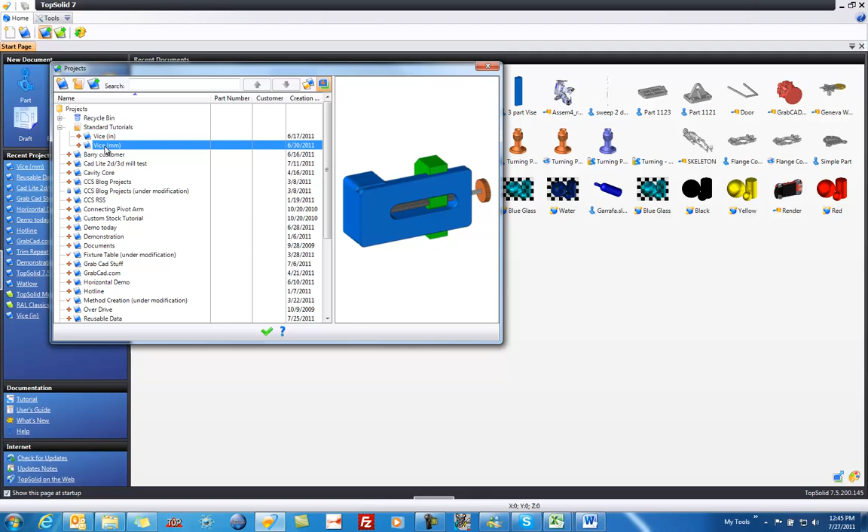To get started, we're going to open up an existing project. So we'll go to our project manager, scroll up until we get to the standard tutorials, and launch the tutorial in either inches or millimeters. In this case, we'll do it in millimeters, so I'll double click there.

The very first thing we want to do is design the base of our vise. To do this, I'll go to my project manager, currently docked on the right side of my screen, right mouse button click on the folder I want to put the part in, and select Part. TopSolid'7 has created a new part for us and is asking us to name the file. Let's name that base. Once I've finished typing the name, I'll hit enter or click elsewhere on the screen.

From here, we're going to create our first sketch. Make sure you're on the Sketch tab, in planar mode, and then select the contour icon. You'll notice TopSolid'7 automatically orients us to the XY plane.

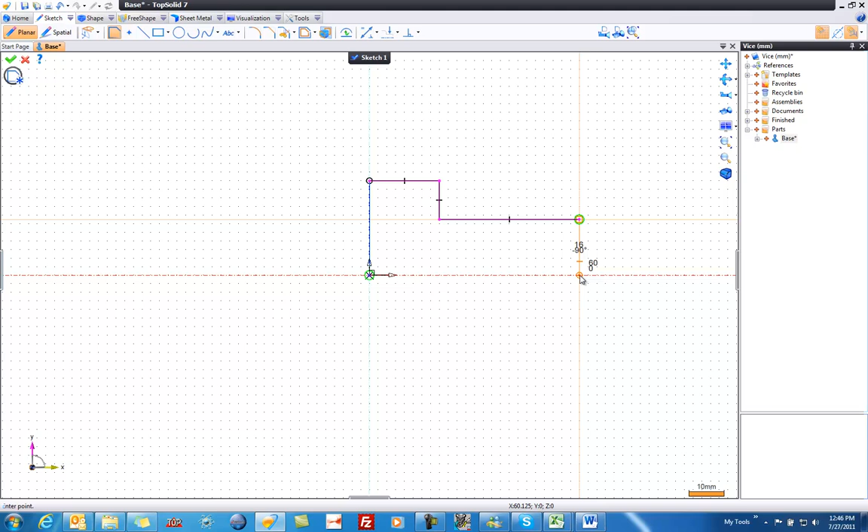We're going to click right on our 0,0 point and come up some distance, then over some distance - I'm not too worried about the sizes just yet. We'll come down, and notice when I hover, I get that little round point adding a relationship. Then I can click back to 0, or hover anywhere on the model or sketch. I'll click right to 0, and like that we've laid out our first sketch.

From here, we're going to add some dimensional constraints. I'll go up to my constraint icon. For power users, you can also get to constraint by right-clicking on the screen and choosing constraint - both will get you to the same place. Now we're going to add some dimensions.

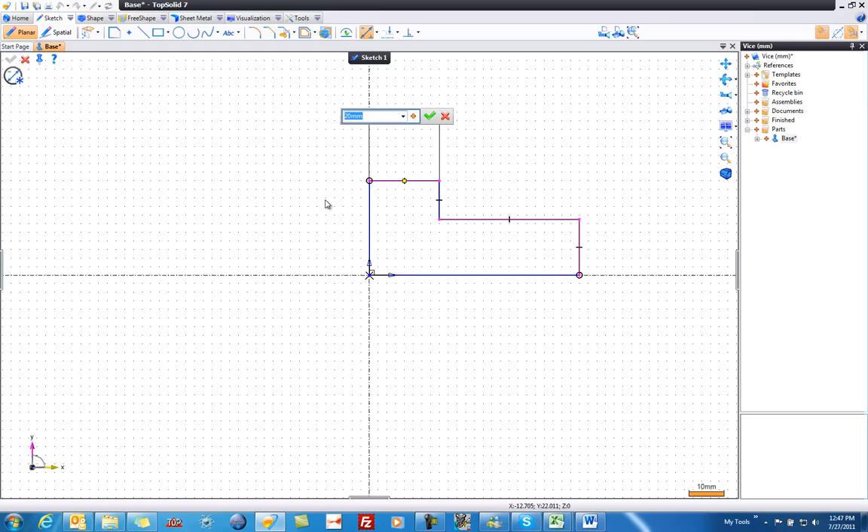I'll start right here, and right now it's coming up and measuring as 30 millimeters. According to the print in the tutorial, we want that to be 40. Watch what happens when I hit enter - you notice how TopSolid'7 was smart enough to auto-scale the entire sketch so that the roughed-in sketch is maintained.

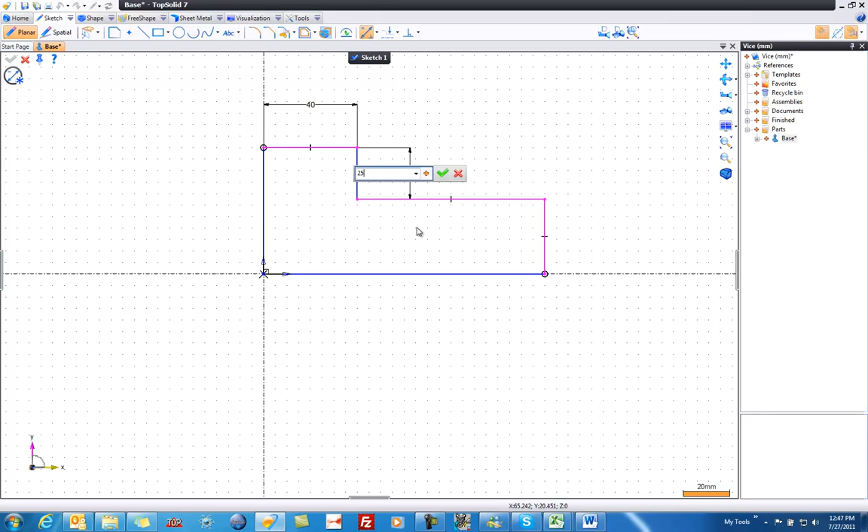Let's add a few more dimensions real fast. I'm going to add one here - that's going to be 25. We'll add another one right here, and that's going to be 24. Now at this point, you'll notice the sketch is blue on all sides except right here, which is purple. What does that mean?

Well, that means that portion of the sketch is under constrained. How do I know? If I left click and hold my mouse on it and grab, I can drag that sketch, but only left and right. That's because these dimensions and geometric constraints, automatically added when we created the sketch, have everything else tied to our 0,0.

So let's go ahead and add our last constraint. I'm just going to select this bottom edge, click to locate, and set the value to 155 millimeters. And like that, our sketch is now fully constrained.

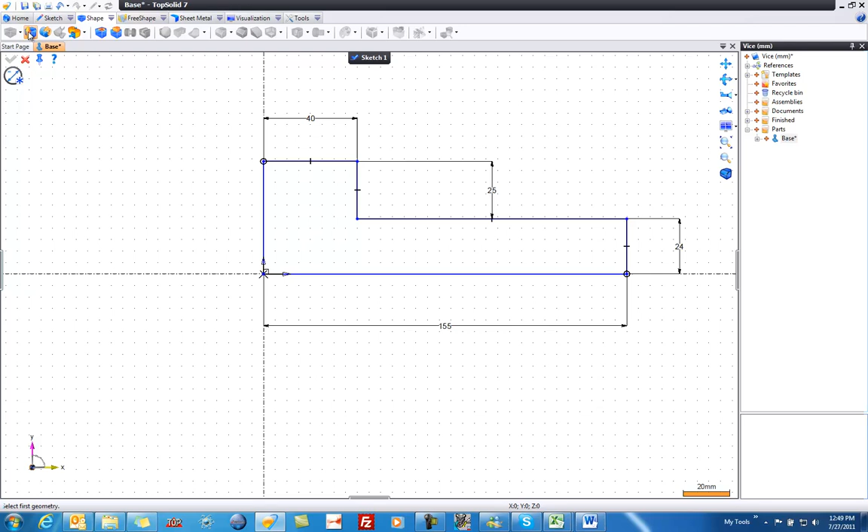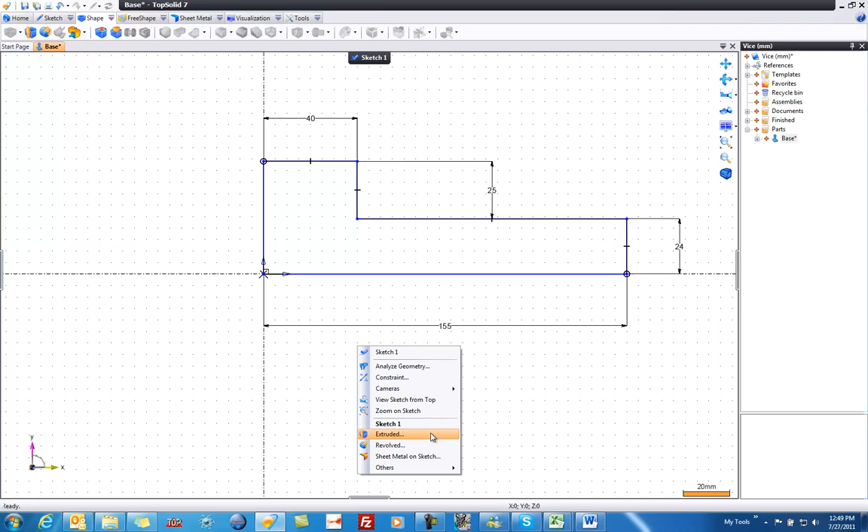The next step will be to extrude this. There are two ways to get to extrude. The first would be to go to the shape icon bar and choose extrude. But another way would be to right click anywhere on the screen and use the contextual menu that TopSolid'7 has created for us. This contextual menu is more or less a smart menu because it changes based on what you're currently doing within TopSolid'7. So here I'll choose extrude from the right mouse button contextual menu.

And like that, TopSolid'7 automatically puts us into an isometric mode so we can go ahead and set the extrusion depth that we want. In this case, we want to pull this measurement up till it's at 40 millimeters.

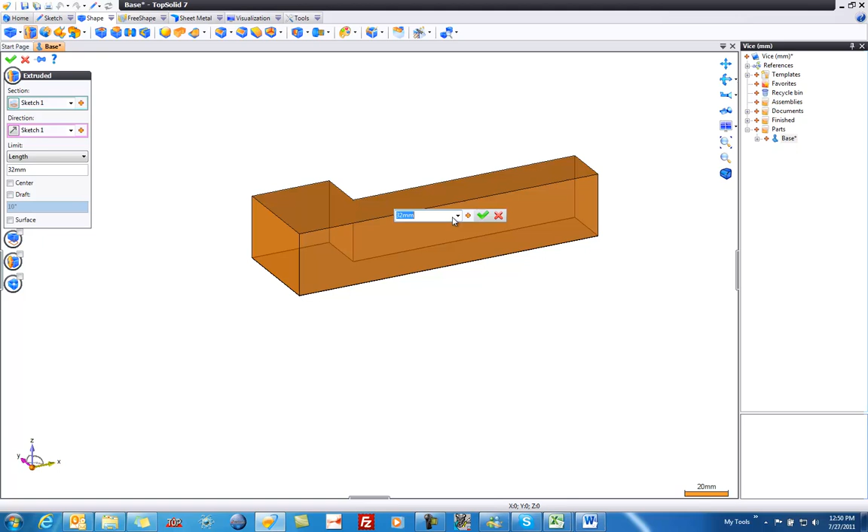There's a couple ways to do that. I can left click and hold on the arrow and dynamically pull this to get it exactly where I want. Or I can double click on the balloon here and type 40. And yet again, I can go into the dialog on the left-hand side of my screen and type the value that I want. Whatever makes the most sense to you, feel free to use TopSolid'7 in that way.

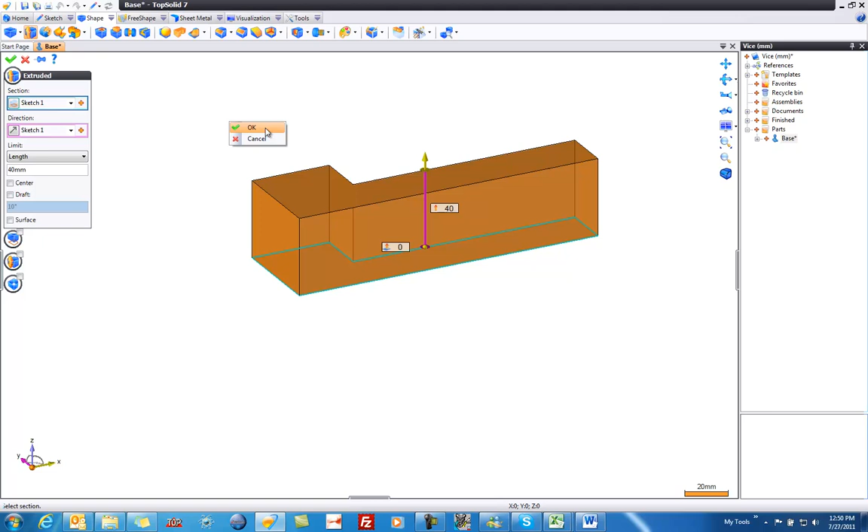Once we've set the value that we want, we can either hit the green check mark up here on the left to validate, right mouse button click and say OK, or do a fast double right click for power users. All three options mean OK.

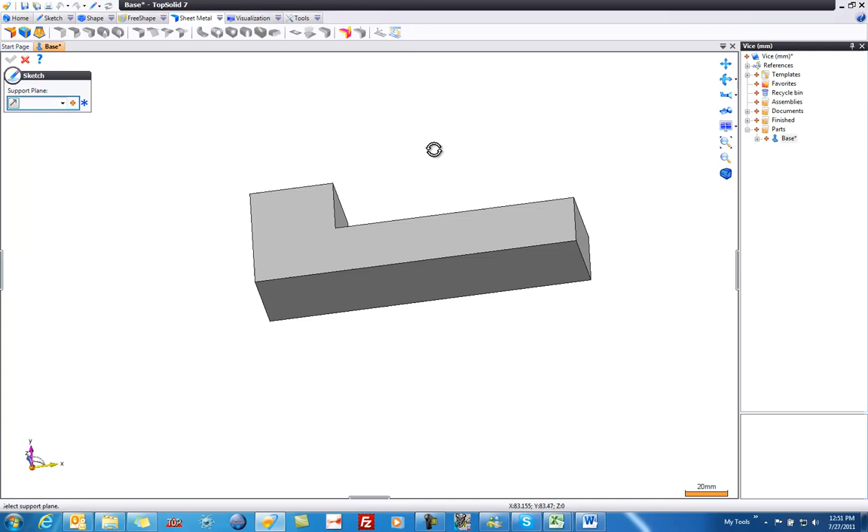Next, we're going to create the next sketch in this tutorial, which is a rectangle. To do so, we're going to go to the Sketch icon bar and choose the rectangle icon. Because we have not selected a plane or a planar face to sketch on, TopSolid 7 is asking us to do so now. It's saying, please select the support plane.

I'm going to hold my middle mouse button down to rotate and select this face here, and like that, we're now drawing on that face. Now to locate our rectangle, I'm going to choose diagonally opposite corners. I'm going to start by hovering on that point there, and you can see it's going to add a relationship. Then I'm going to bring my mouse over to here and left click right on that edge, relating my sketch length to that edge as well.

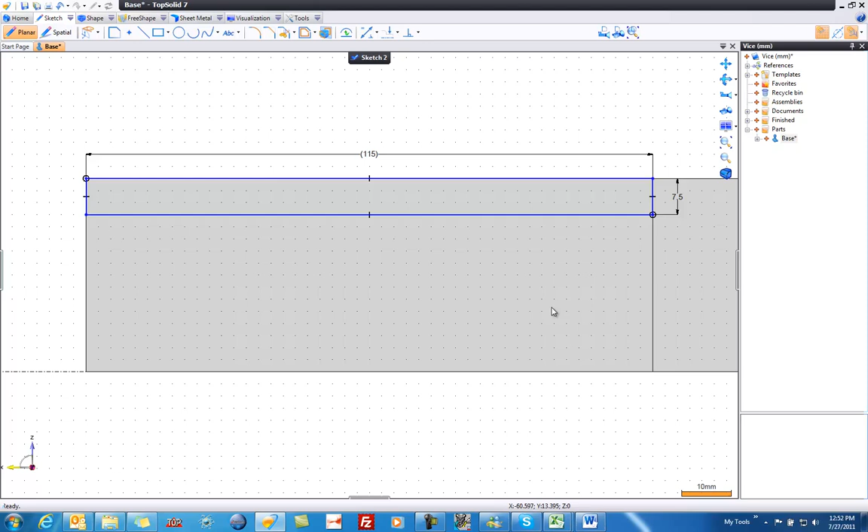Now I'm going to hit escape real fast here, and I want to point out a couple things. First of all, you'll notice that this dimension reads 7.5. This dimension reads 115, but in parentheses. The parentheses tells you that it's a driven dimension. A driven dimension is a dimension that is driven by geometric change itself. So for example, if I go back and modify my original sketch and shift this edge, this sketch will follow suit, and that's because of this coincident relationship that was automatically added when I created the sketch.

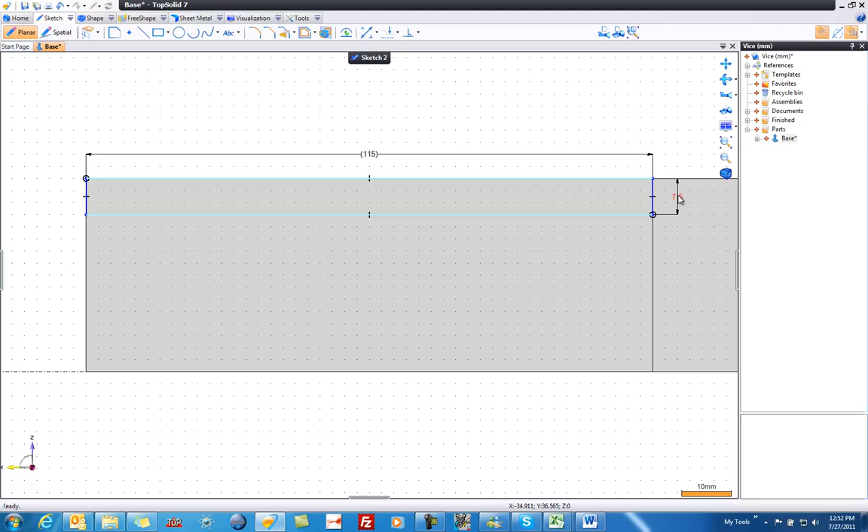Now I want to modify this dimension here. To do so, you just double left mouse button click on it, and we're going to set this to 12 millimeters. And like that, we now have our rectangle exactly at the size we want it to be.

Next, we're going to go ahead and add a corner fillet. So we're going to go up in our sketch icon bar and go to the fillet radius function, and here we're going to set it to be 5 millimeters. So I'm going to type 5 and hit enter.

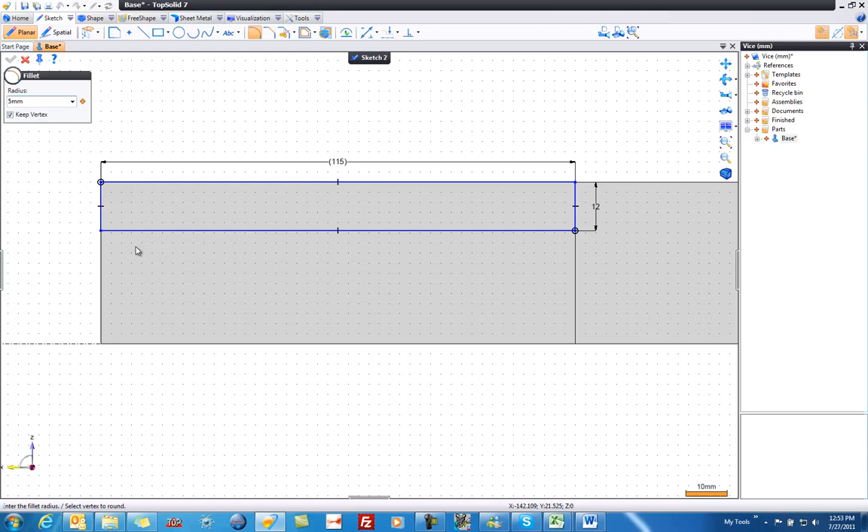Now I'm just going to choose the vertex that I want to apply that radius to. Here's something cool: you have an option called keep vertex, and you want to make sure that's checked because our dimension is driven to that point. When we say OK there, you can see the vertex has been maintained and our dimension has been maintained as well. And like that, we're now done with the fillet function.

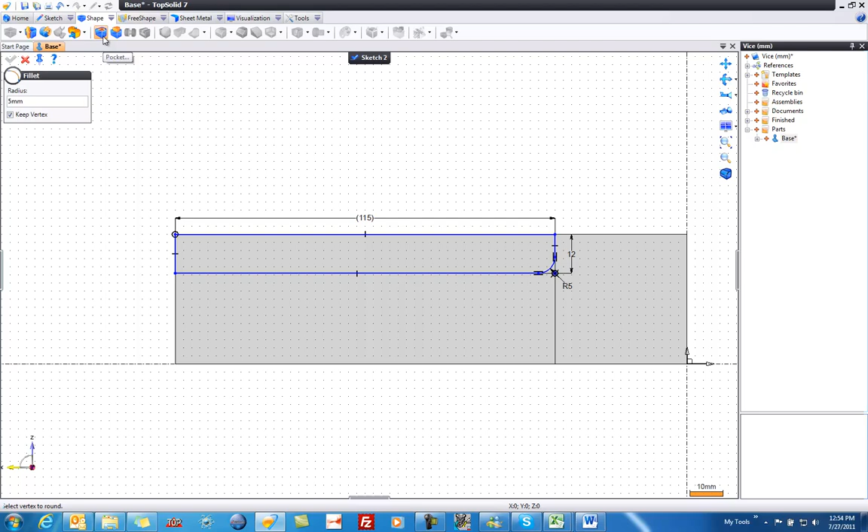Next, we're going to add a pocket. Again, there's two ways to do this. One is to go to the Shape tab and choose Pocket. Another is just to right mouse button click and choose Pocket from the Smart menu or the right mouse button click contextual menu.

Like that, we go into the pocket mode, and as you can see, we can drag this to whatever depth we want. The last time I used this mode, I was in inches. So if I double click here, I can type 5, for example, and hit enter, and it'll now switch to metric, which is the unit of measure we want to be working in. And I can drag this up and down to get it to the 6 millimeter value that we want. Or again, you can double click on the balloon there or set the value here.

You'll notice also I have a fillet turned on here, and we want to turn that off. So I'm going to turn off blend fillet. TopSolid 7 is set to remember all the settings from the previous use of any dialog box, so be sure to check to make sure you have everything set the way you want. Once you're done, validate the operation.

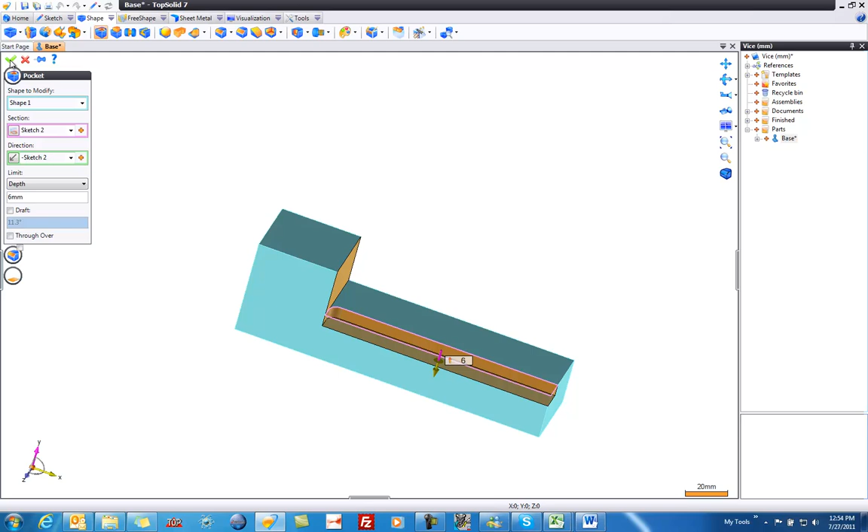Next, we're going to create another sketch, but this time we're going to do it a little bit differently. Instead of going to our sketch icon bar, I'm just going to right click on the screen and see what I can do. And look at that, I can create a sketch. Again, because I never selected anything, the software is asking for a support plane, so I'm going to go ahead and choose that face there.

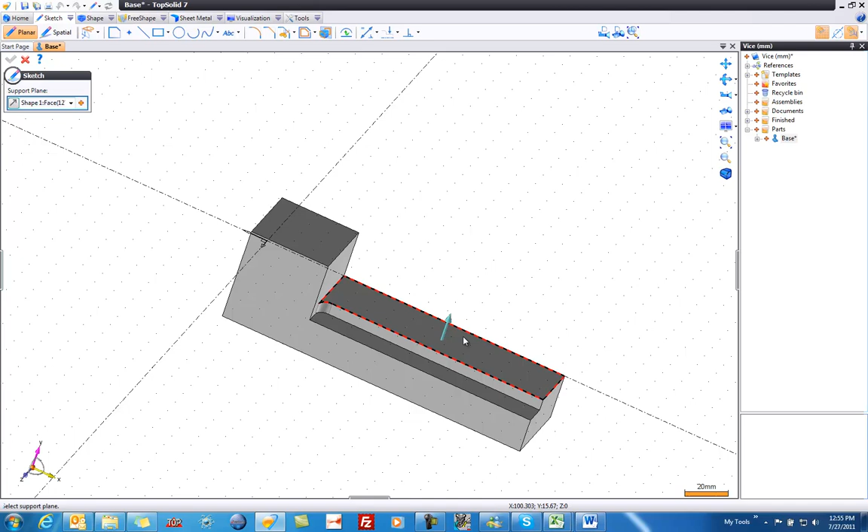Next, we're going to choose contour. From here, I want to expand the contour dialog if it's not already done on your screen. You can minimize or maximize it just by clicking on its icon. What we're going to do here is I'm going to start by clicking a spot right there, and I'm going to come over some distance to the right. I want to make sure, by the way, that I'm going exactly horizontal - you can tell by the 0 degrees in the smart dimensions there.

I'm going to left mouse button click to locate that, and now what we want to do is we want to make a tangent arc.

There are a bunch of ways to do this, and I'm going to try to show you all of them just to show you some of the power of TopSolid 7 Sketcher. I can of course go to the dialog and switch to tangent arc, and like that you can see I'm drawing a tangent arc. I'm going to go back to line. Another way is I can tap the A button on my keyboard to switch to arc. Tap it to turn it off.

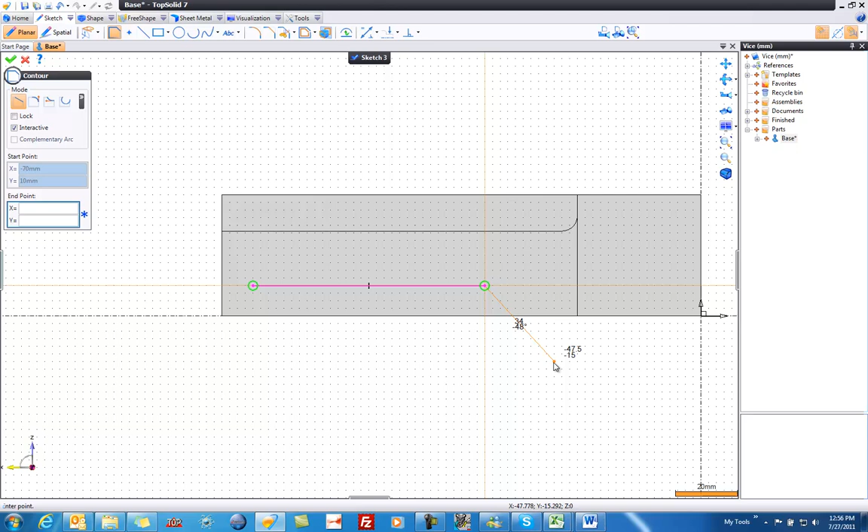Pretty cool. Yet another way, right mouse button click anywhere on the screen and switch to tangent arc. Pretty cool, right? There's yet one more way, and this is the most dynamic way. If you go and hover on your previous point and then drag back off this way, you'll get a tangent arc. If you go and hover on your point that way and drag off to the bottom, you get a perpendicular arc. Pretty cool, huh?

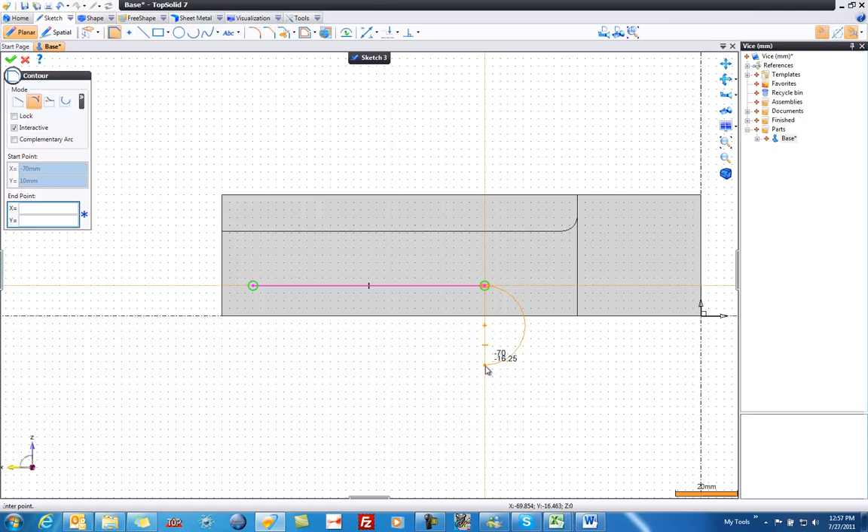Well, now I'm going to go ahead and create my arc, and I want to make a 180 degree arc, so I'm going to make sure that point is just below my last point. We're going to switch automatically to line. I want to drag my mouse over to here until I'm hovering over that point. Left click again, and I'm going to dynamically create my tangent arc. And to close it, I want to be tangent to that, so I'm just going to select, and now I have the sketch made that I'm looking to create.

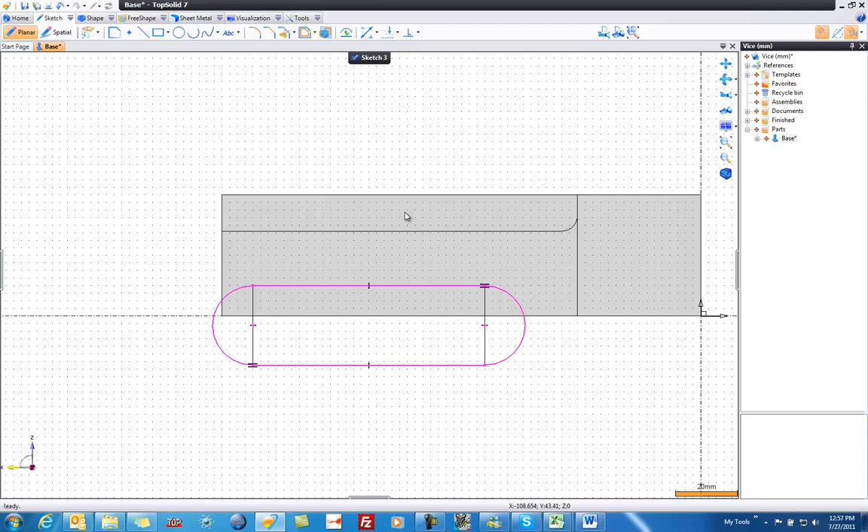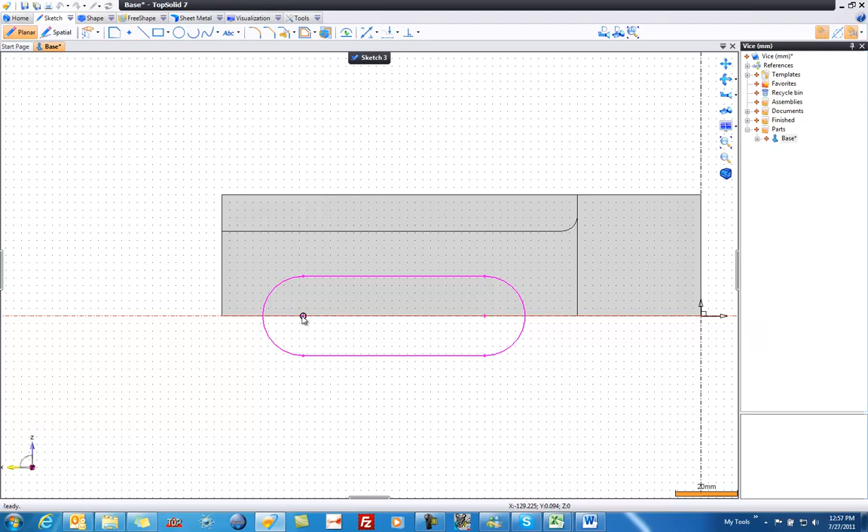From here, I'm going to grab this point and move my mouse around it. You can see that the sketch is being maintained, and I'm dragging it around freely. Well, what I want to do is locate that center point instead right on my edge of my part right there. So if I dynamically drag it down, it's going to automatically add that coincident relationship. Now, if yours doesn't do that, go up here and check to make sure you have automatic alignments and automatic relations turned on. You'll know they're turned on because their associated icons are lit up.

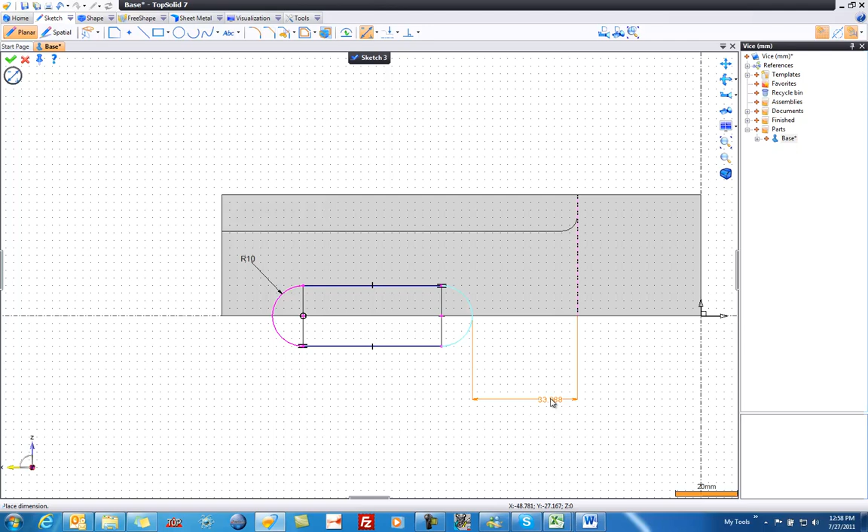From there, we're going to add some constraints or some dimensions. Again, you can go to the icon or you can right-click and choose constraint, whatever you're most comfortable with. So let's go ahead and add our dimensions. I'm going to start by adding a radius here. I'm going to set that to 10. I'm going to add a dimension from here to here. Maybe I'll drag that over to there and locate it. And that's going to be 2 millimeters.

And I'll add a dimension from here to the other edge. And notice that you don't have to do anything special to drive by tangency here. That's pretty cool. We'll make that 20 millimeters. And like that, our sketch is now fully defined. And how do I know that again? It's because the sketch is blue.

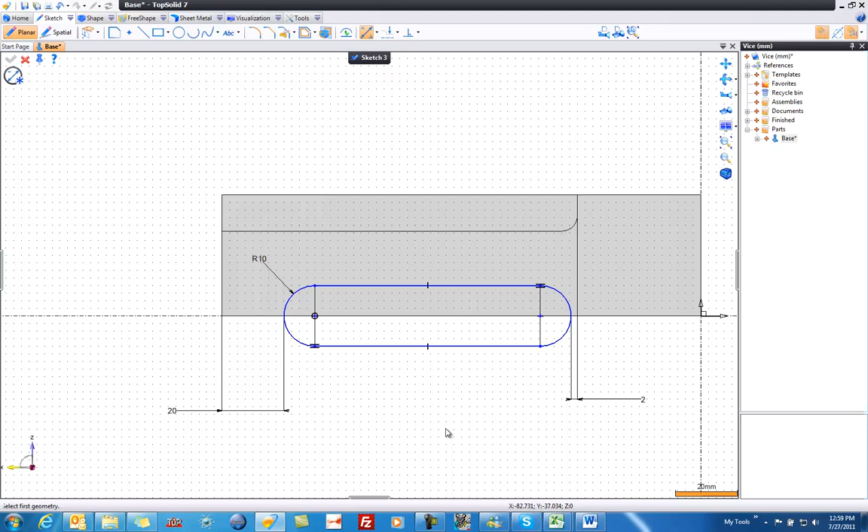Next, we're going to use that sketch to trim away the model. Again, we can go up to Shape, and we can choose Trim from here if we want. But instead, I'm just going to right-click and choose Trim by Profile from this menu. You'll notice that I tend to right-click a lot. It's just where I'm more comfortable working. I want to make sure I'm on the right trimming method. Here I want to trim by extruded profile.

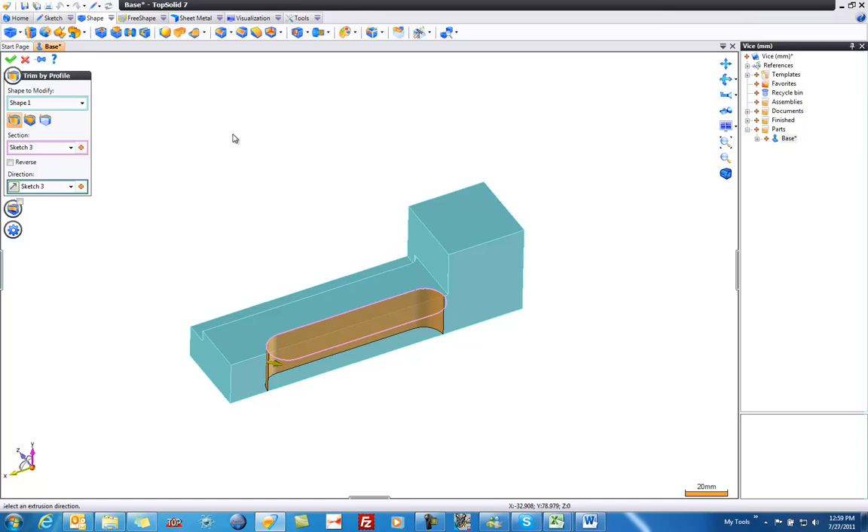And you'll notice that you get a preview. Everything in TopSolid 7 gives you dynamic previews, so you know you're getting exactly what you want before you even ask the software to calculate it. Please note that the arrow points to the side to delete. If I want to delete the outside of the profile, I just double-click on the arrow. Inside, double-click again to send it in. And once you're done, double fast left-click to validate. And like that, the trimming operation is complete.

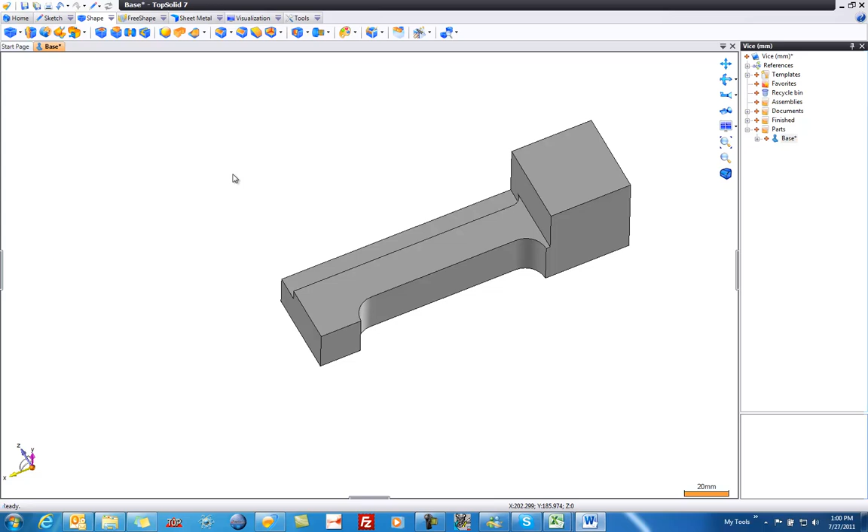Next, what we're going to do is we're going to add another sketch. But I'm going to show you the most direct way to create a sketch now, especially when you're just dealing with something prismatic like this part. I'm going to use my space mouse now to rotate, just to show you a different way of manipulating. And I'm going to go to this face, right mouse button click, and create a sketch directly on that face. And that's pretty cool. It just activates everything dynamically for us. It even goes to contour right away.

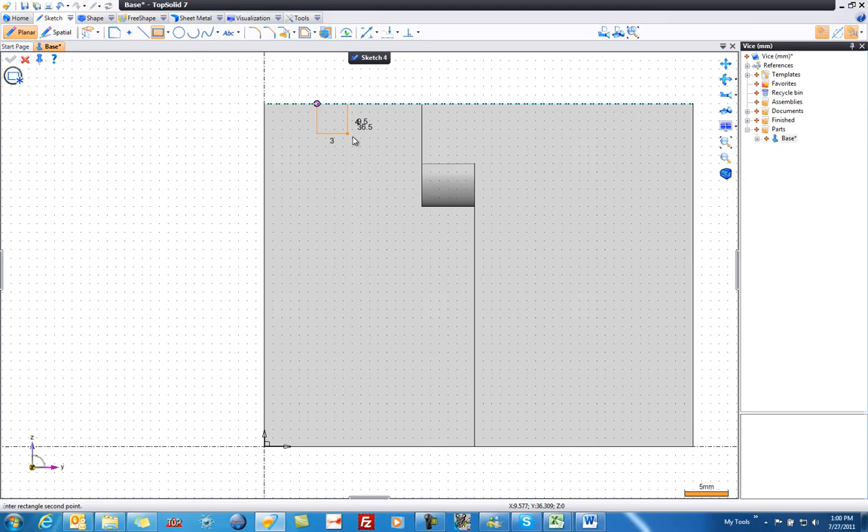That's pretty cool. Now you could create a rectangle using contour if you want, or you can just go to the rectangle command. That's what I'm going to do. And I'm going to start on that edge and drag a rectangle down till I'm there. I'm going to hit Escape, and I'm going to add one more dimension. I want a dimension from that edge to this edge, and I'll locate that dimension. And I want to set all of them to be 6. So I'm going to type 6 and hit Enter. Double click, 6, Enter. Double click, 6, Enter. Like that, my sketch is fully defined.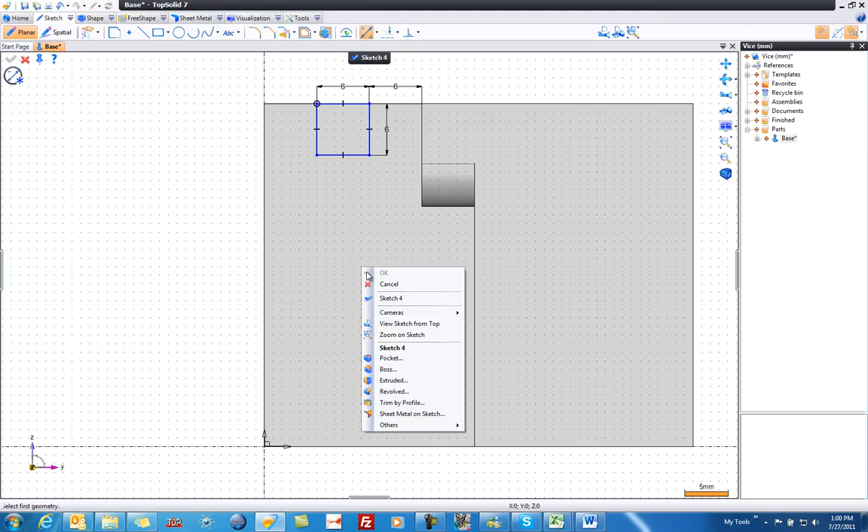And at this point, we're now just going to use that to trim with as well. So I'm going to right click, Trim by Profile. You'll see the dynamic preview. If you look, the arrow's pointing to the inside, which is exactly what we want. So we'll validate.

From here, we're going to right-click on that same face, create another sketch. It'll be another rectangle, starting at that point, coming down and referencing that edge. Now, I'm a lucky guy. It just so happens I drew that exactly where I wanted it, which is 2.5. If you didn't get it there, just double-click and modify it to be 2.5 millimeters.

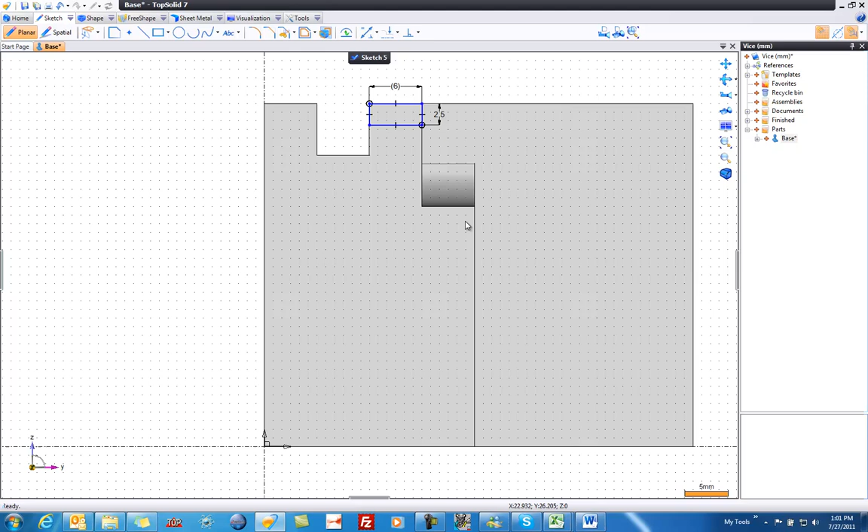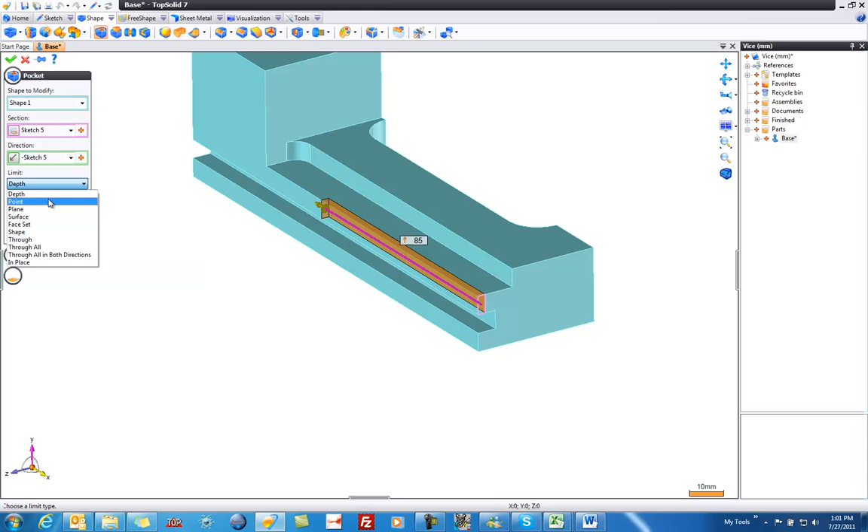From here, we're going to create a pocket. Why are we going to create a pocket? Well, you'll see in a second. I'm going to go to Pocket, and like that, you can see I can grab on the grip to drag this to whatever depth I want. Now, I can go back in my print and figure out what the distance is from this face to this face, or I can change my limit condition to be up to a plane and just choose my planar face there.

And what I'm doing here is capturing my design intent, and that design intent is that I'm pocketing from this face up to this face, regardless of where this face moves to in future design changes. Pretty neat. Let's validate that. And now that feature is complete.

Next, we're going to add some 6 millimeter fillets. 2 ways to do this. As you're noticing in TopSolid 7 by now, you have multiple ways to get to the same end result, which is pretty cool. It lends a lot of freedom to individuals to design the way they're comfortable designing. So under the shape icon bar, I can go to fillet. Or, you guessed it, I can select an edge, for example, right mouse button click, and choose fillet as well. And like that, I'm going to set my value to 6 millimeters.

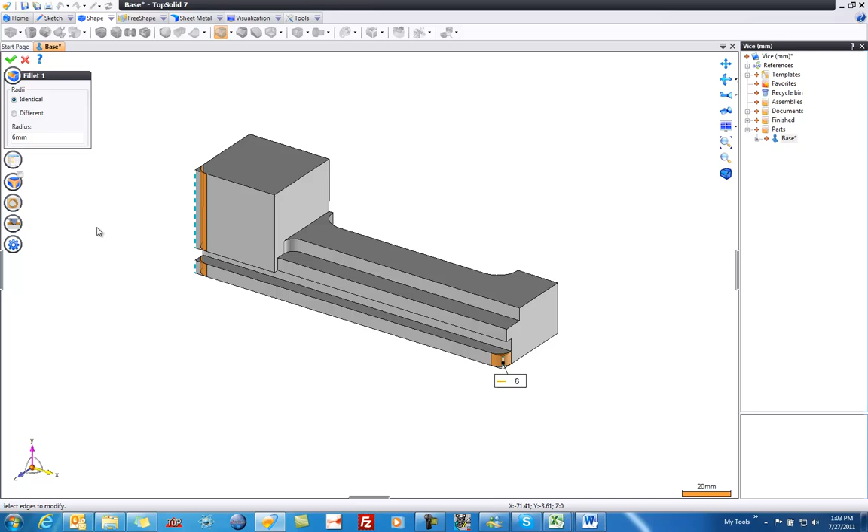Now, here, I hit Enter on accident. Well, when I hit Enter, it validated the fillet. What I'm going to do instead of deleting that feature is I'm just going to zoom up, right mouse button click on it, and choose Edit. This isn't really following the tutorial per se, but it's because I hit Enter. Now you know how to get back in and edit a feature. From there, I'm going to select this edge and this edge. So now I have the 3 edges that I want to apply that fillet to, and now we can validate.

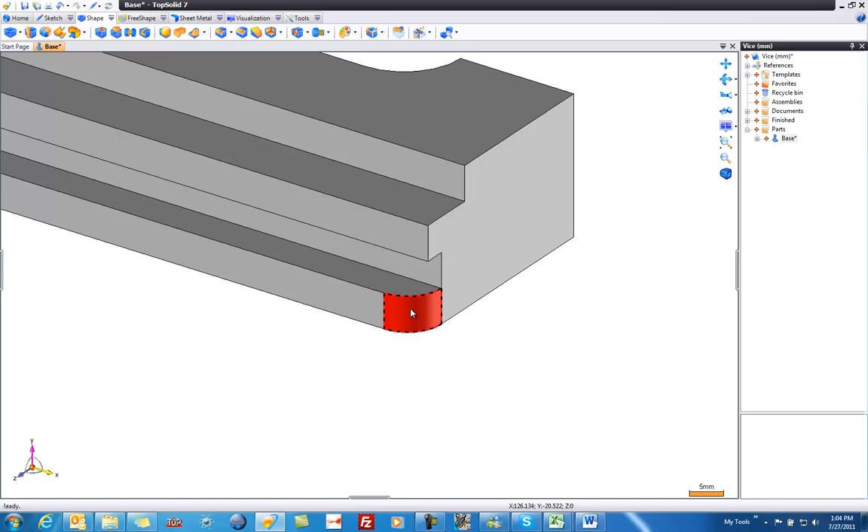Next, I want to put a fillet on this edge. I want it to be actually smaller than this fillet, but I'm too lazy to go and grab the fillet function. So I'm going to show you a really cool feature of TopSolid 7. I'm going to hold the Control key down on my keyboard, grab this fillet, and drag and drop it onto that edge. Now in order to get that edge, I might need to use my toggle selection. So I'm going to, while holding my left button down, tap my right button once to grab just the edge, and then I'll let go. And as you can see, we just dynamically dragged and dropped that feature.

Now, I want to modify that feature. I want to double click on it to get its driving dimension. Then I can double click on the dimension itself, set it to 3, and hit enter.

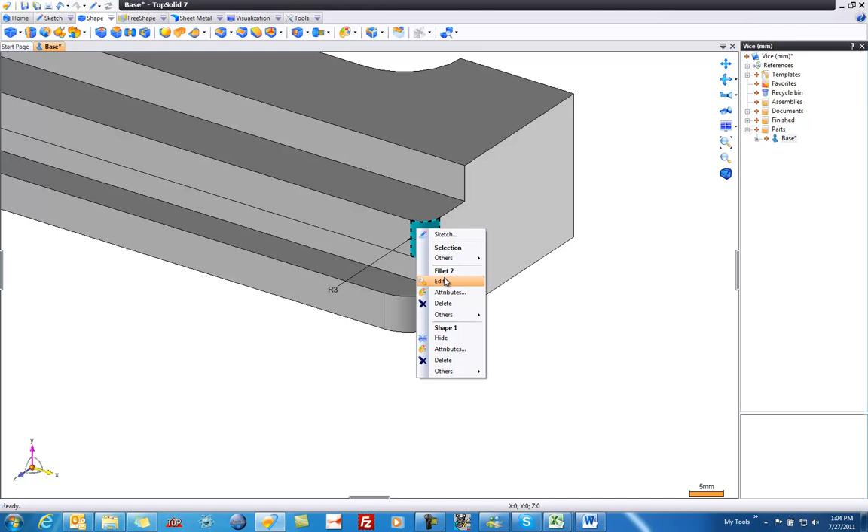Now, I've also decided that I would like to have the same 3mm fillet on this edge. Now I could drag and drop it on there, but it would be smarter if I just add that edge to the same feature. So I'm just going to right click on that fillet and edit its feature. And you notice here it's talking about the fillet feature right here. And I'll go ahead and select this edge here. And once that edge is selected, I'll validate, and you can see I've now added the fillet. And I'll double click on that face to hide the driving dimension as well.

Now we're going to add one more fillet, and that's going to be over here. I'm just going to select this edge, right mouse button click, choose fillet, and we're going to set this to 5mm. Perfect.

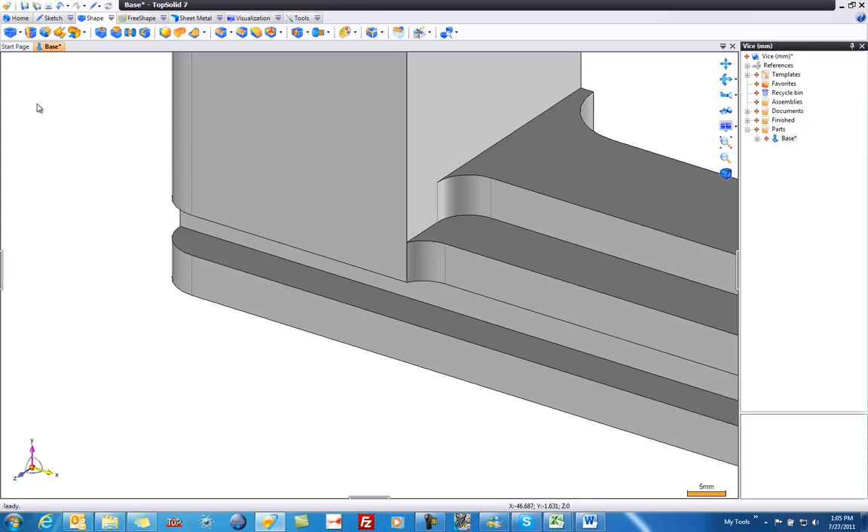Okay, at this point, we've actually designed most of our model. But, as you notice, we've only designed half of it. So where we're going to go now is to what we call a pattern union. To access that, you're going to go to the Shape tab, and then to Pattern Union. The first thing it wants to know is what shape to modify. And you'll notice it already selected the solid for us. And now it wants to know what pattern. Well, if I click on the combo box here, you can see there are no patterns available. And this is a unique feature of TopSolid 7.

If we had created a pattern for a feature elsewhere in this design, we could reuse it right now if we wanted the identical pattern. Since we haven't, we have to add a new type of pattern. So we'll hit the little plus sign here and choose Symmetrical Pattern. In this case, we want to choose a simple plane. And our symmetry plane can be a standard plane.

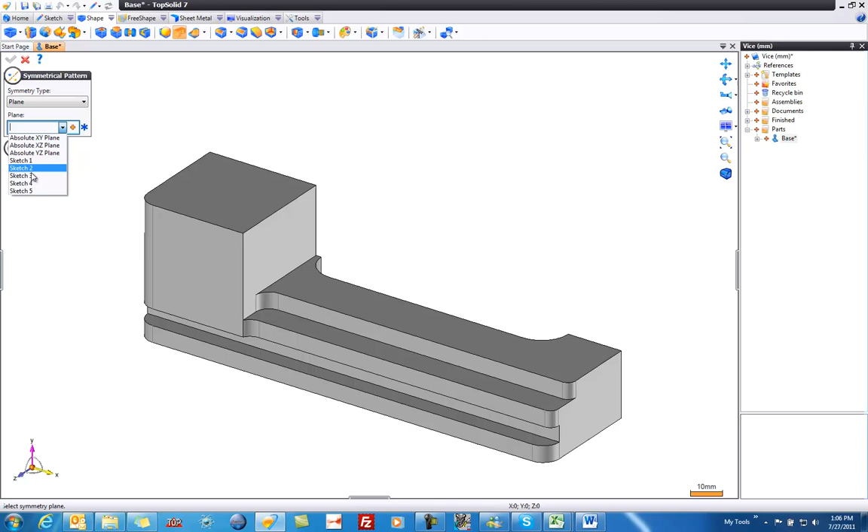It can be based off the plane referenced by any of the sketches, or it can be a planar face itself. So I can just choose this face right here. You get a little preview. We'll go ahead and validate, and we'll validate the pattern. And like that, you now have the entire model done. Just a few more steps. Real fast, I don't want to see these features anymore, so I'm going to just right click and hide those elements.

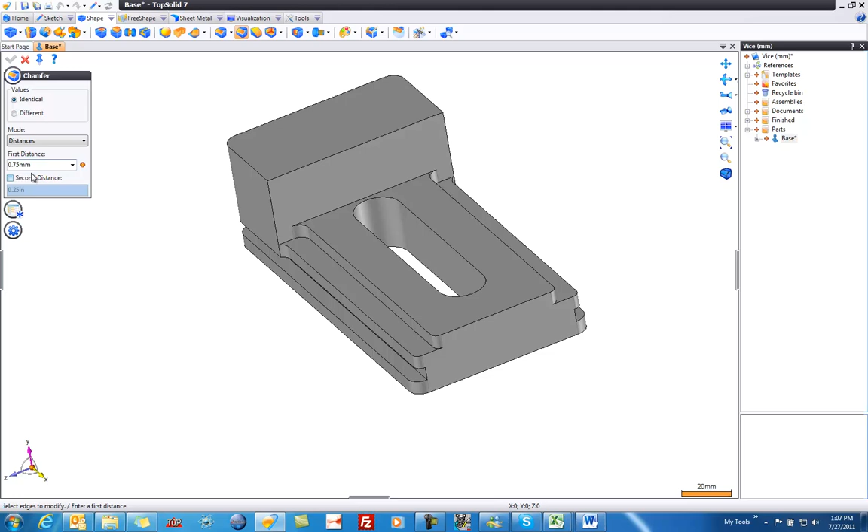Now what we're going to do is we're going to add a bunch of chamfers. So let's go up to the shape icon bar and choose chamfer. I'm going to set myself to 0.75mm. And I'm going to select this top face, which grabs all those edges. And that'll grab that edge. I'm going to grab this edge, and basically all the edges that I want to add a chamfer to.

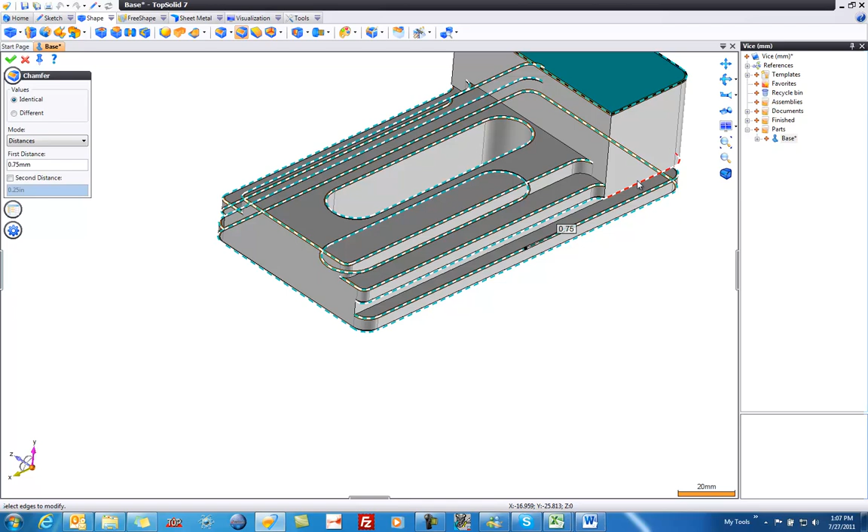And you can see I'm going to zoom up, grab there. We'll grab this edge here as well. Let's go to the other side and grab those missing edges too. Once you have all the edges selected, go ahead and validate this operation.

Okay, the last feature that we're going to add is our tapped hole. To do that, I'm just going to go right on this face, right mouse button click, and choose drilling. Of course, I could have chosen drilling up here from the icon bar as well. From here, I'm going to switch to tapped hole. I'm going to make sure that I'm on the right standard, in this case metric. And I'm going to look for my nominal diameter to be 10mm.

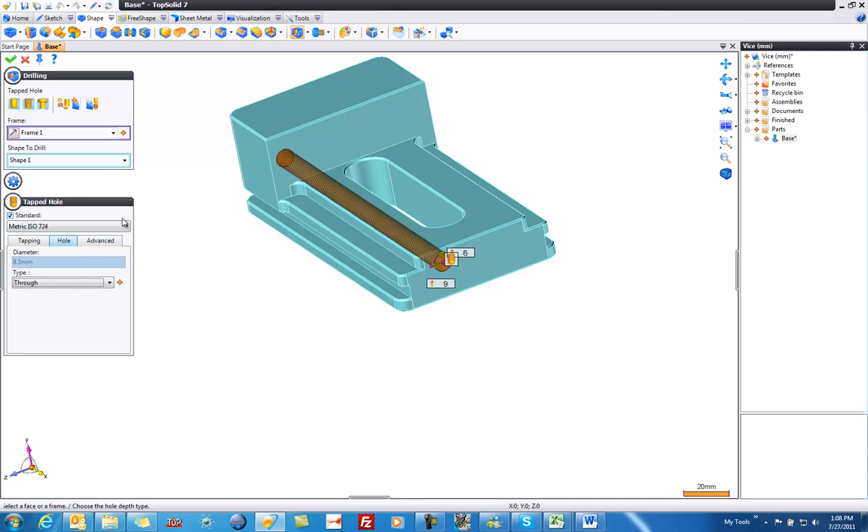You can see it automatically searched the database, found a 10mm diameter tapping, and set the pitch correctly for it. We also want complete tapping to be true. And then we want to go to the hole and set it to be, yeah, through works for me. Why not? Okay? And like that, I'm just going to zoom up over here, and I can drag this feature wherever I want it to be.

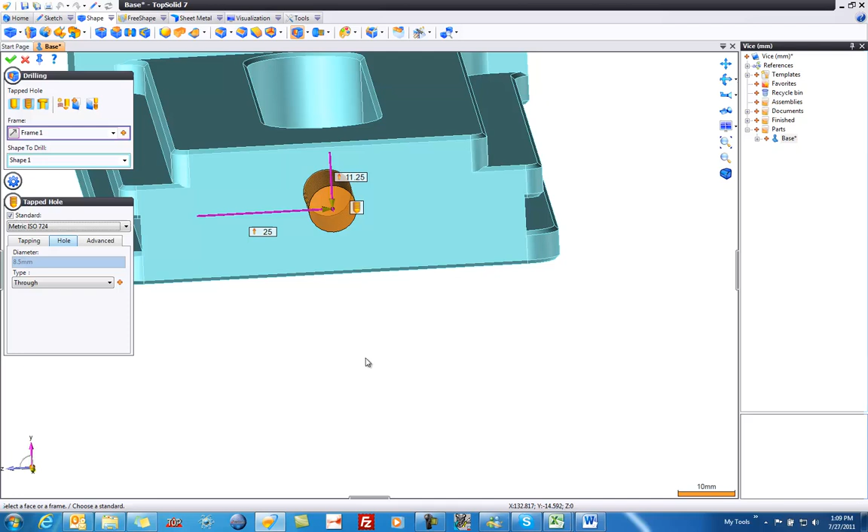And in this case, we can also double click on the value. For example, I want this to be at 11 1/4, and I want this to be at 25. Now that's exactly located where I want it, so I can validate the drilling. And you can notice when we added tapping in TopSolid 7, the tapped holes look tapped.

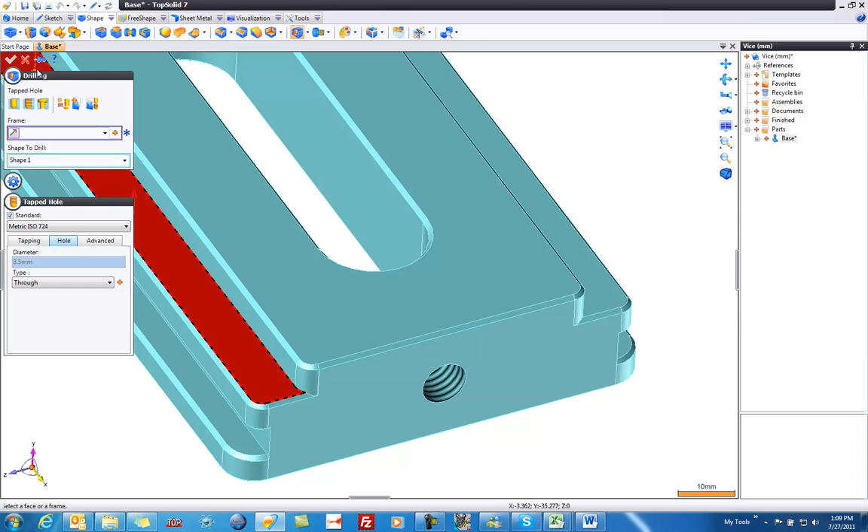Okay, let's exit out of drilling. You'll notice that drilling stayed up on my screen. It might not have hit on yours. The reason is because I had the push pin pushed in. If I was to select there, that means after I apply a drilling, it will automatically close the function. So it's up to you whether or not to leave the functions modal or not.

The last thing that we're going to do to this is we're going to define the properties of this part. And the properties are used for documentation down the road in such things like your bill of materials. So to define your properties, you're going to go to your Project Manager tree, select the part, right mouse button click, and go to Properties. And here, a window is going to pop up. I'm just going to click Edit, and I'm going to fill this in the way I want.

I do want the name to stay as base. The description here might be something like, this is the base of the small vice. Part number, you can use your imagination. I'm going to type SM5500. Again, just following the written tutorial that you're following. The manufacturer, I'm going to be creative here and say it's my company, Clear Cut Solutions.

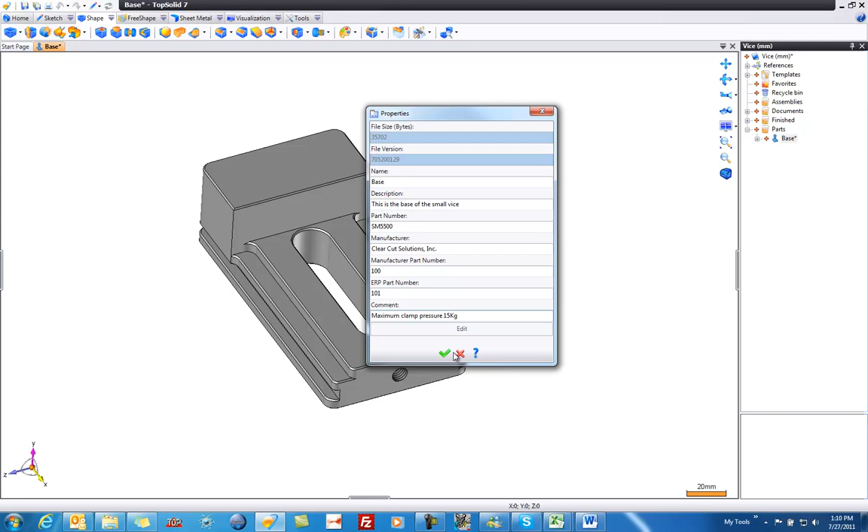The manufacturer part number is 100. The ERP number is maybe 101. And maybe the maximum clamp pressure is 15 kilograms. Like that, the properties are now set. The very last thing you want to do is make sure you save your work.

There's lots of ways to save your work. You can go up here and just hit Save. That's for the current document. Save All if you have multiple documents open and you want to save everything. I can right mouse button click on the tab and hit Save or Save All. I can also right click on the part itself and go to Save. So you can see lots of ways to work. By the way, one last point, you can also hit Control S on your keyboard, standard Windows Save.

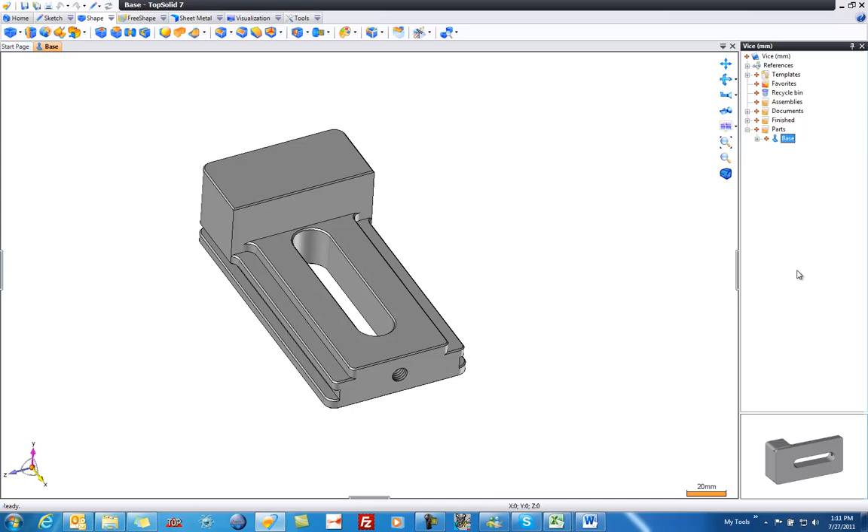At this point, you've now designed the base and are ready to move on to the next section of this tutorial. I hope you found this video to be informative and you've learned a lot about TopSolid 7.